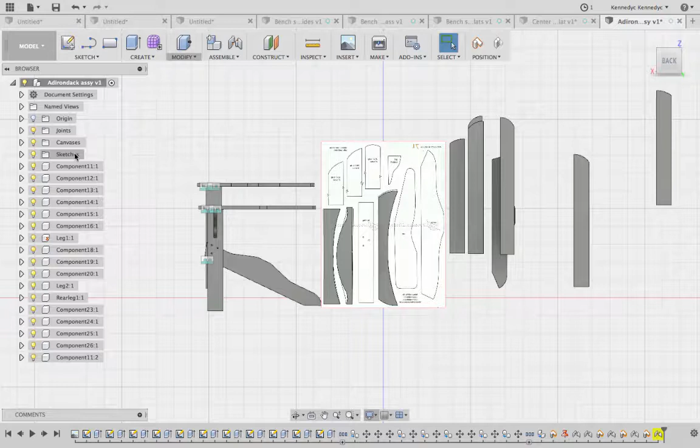As you can see, once we've started creating lots and lots of pieces for a more complex design like the Adirondack chair, it gets very messy down here if we're not following those rules and coming through and actually naming components. So it's really important that we actually do that from the beginning.

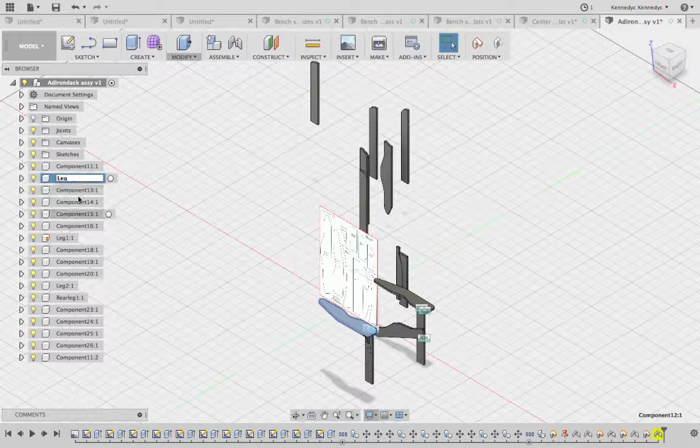You can see on this one here, we start to have a look at each part. We can come through. I've changed them all to components, but I haven't named them. So this one is going to be called the arm, and it's the left one. And click on each component. This one here is the upper rear cross piece.

This one here is rear back slat. And you get the picture, so on and so forth. You can come through and develop all of those.

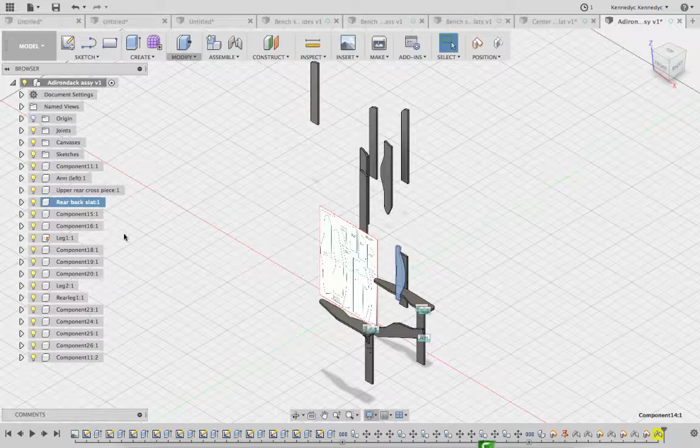Now, if you have used a canvas and created all of your parts, you might create each of these parts sitting on the canvas, extrude the profile, and then slide them off to the side like I've done here. But they won't be in the correct orientation. They're all going to be as though they're laying flat on the ground, not assembled. So when you come through to prepare them for assembly, you need to get them in the correct orientation.

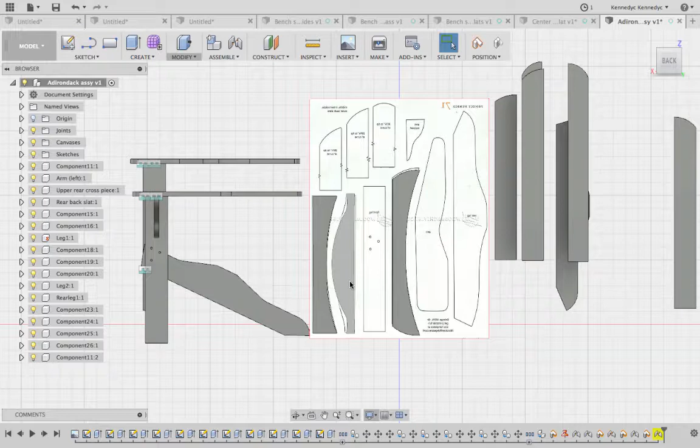So a couple of things. First of all, let me show you this one here. We'll check out that view in that orientation. Notice the last thing I need to do to this one is actually put a beveled edge on that. So if I zoom in, we can go to

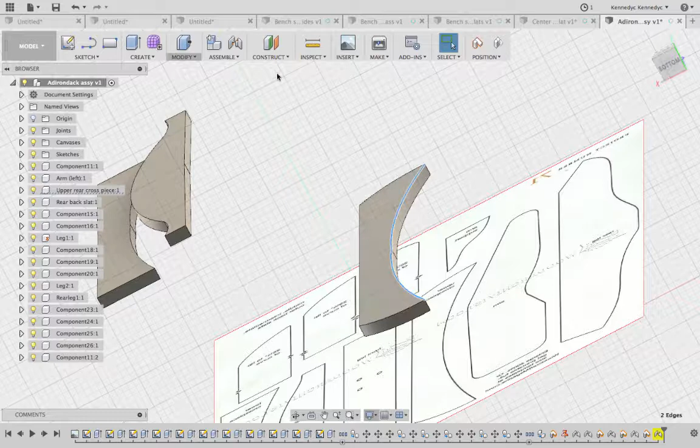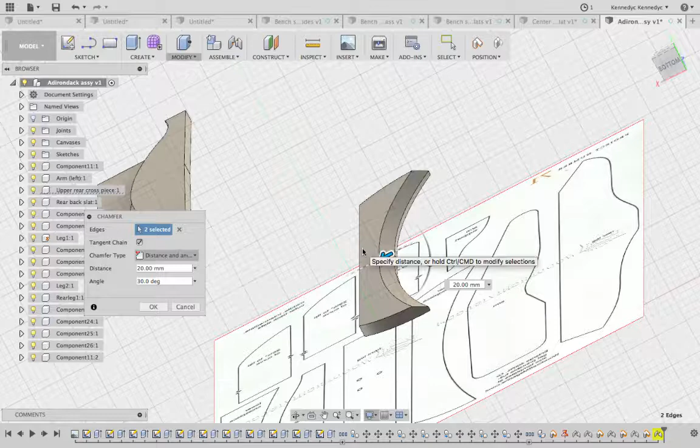chamfer, and rather than a 45-degree chamfer, we might say distance and angle, and I want the angle to be the angle that the back slats sit back at, I think, is 30 degrees. And so we put that in at 30 degrees, and we're going to just push that back because the back slats are actually going to lean back on that. So that's the final thing we need to do for the upper rear cross piece.

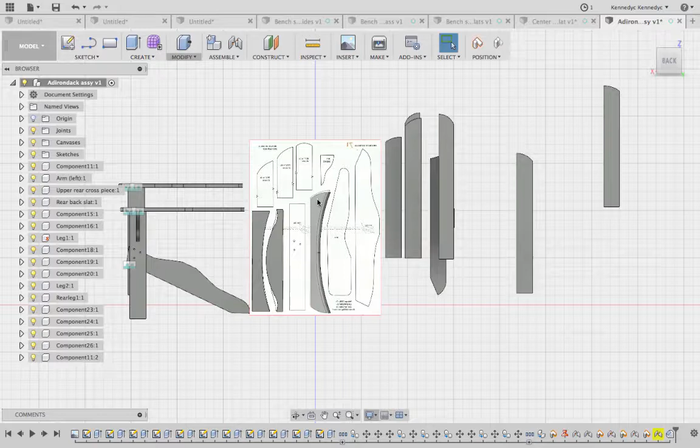And then we can come through, and I'm just going to pick the correct view. Click OK. And we're going to go to that back view there. We want to go to modify and move or copy. And we're going to say, well, which components do we want to move? We've selected this one here. And then we just need to get it in the right angle.

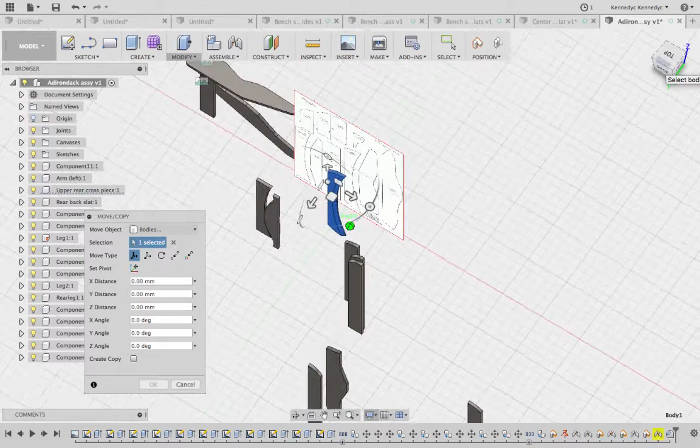So this needs to be flipped so that it sits at the back there horizontally. And it's not doing anything like that at all at the moment. So what we're going to do is we're just going to move that around until we can pick up this piece here. I'm going to bring that up at 90 degrees there. Okay, now it's facing the wrong way, but it's in the correct plane.

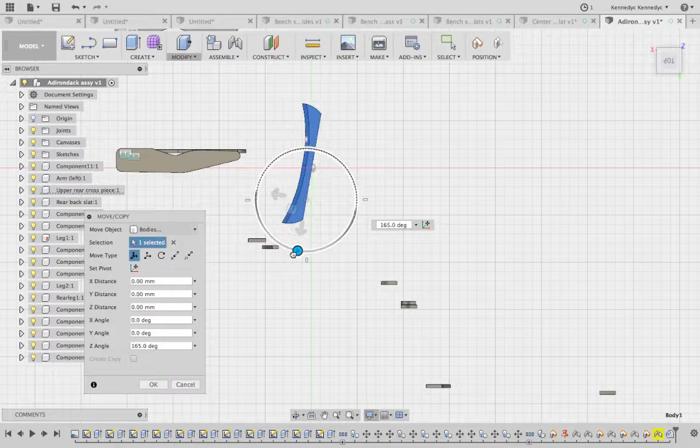So I might go to my top view, and we can grab that little movement wheel and flick around 180. You can specify the angle, or it should snap in and lock into those key distances. Click OK, and we'll go back to our isometric view. You can see that's in the correct orientation now. I haven't assembled it yet, but it's in the correct orientation, ready to go. And you come through and do that for all of these.

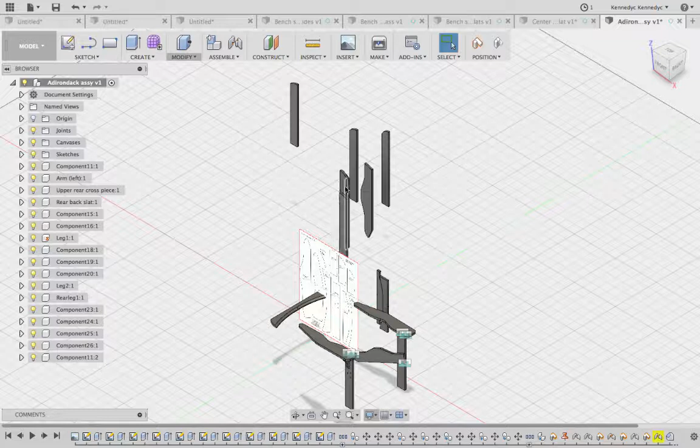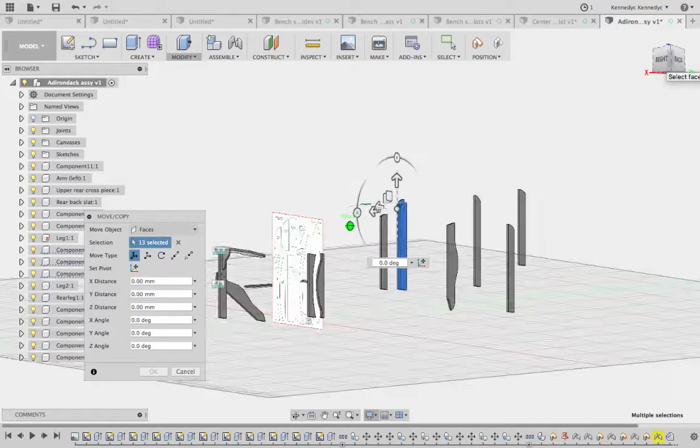Okay, so if we click on our slats here, we click M for move or copy, and then we're going to come around and pick the correct plane. Whoops. I've selected a face. I want to select the whole component. I might need to go to a different view just to isolate that. Let's pick this one here. Selected too many there. We're going to click on that. We want to select components, and that's it there.

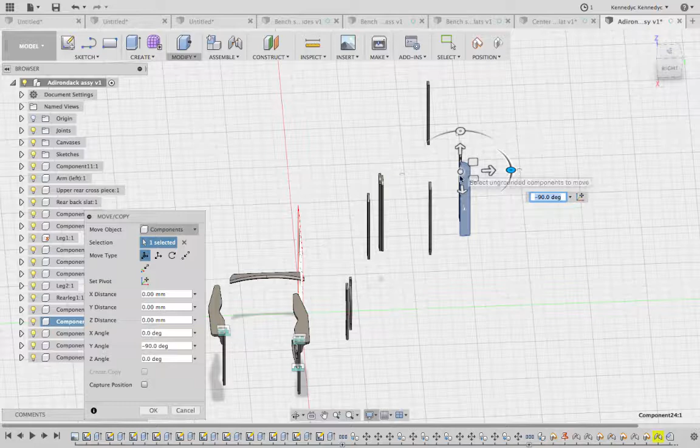Okay. Work out which plane it's in, and we're going to select this one here and swing that around. And that one will act as my right intermediate back slat. Click OK, and then you can move on to the next one. So again, it's going to be a lot of toggling around, playing around with the little cube up the top to find the views. Okay, and this one here, rear back slat.

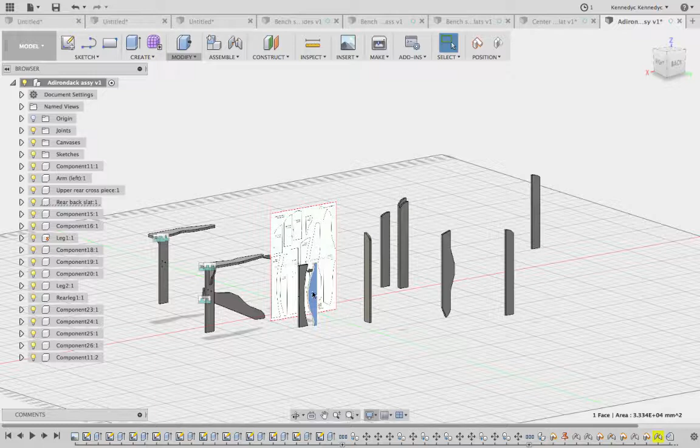Let's click M for move. Now I've selected its face there. We want to deselect that. Click on components and select that as a whole component. We're going to need to move that around until I can find the correct one to move.

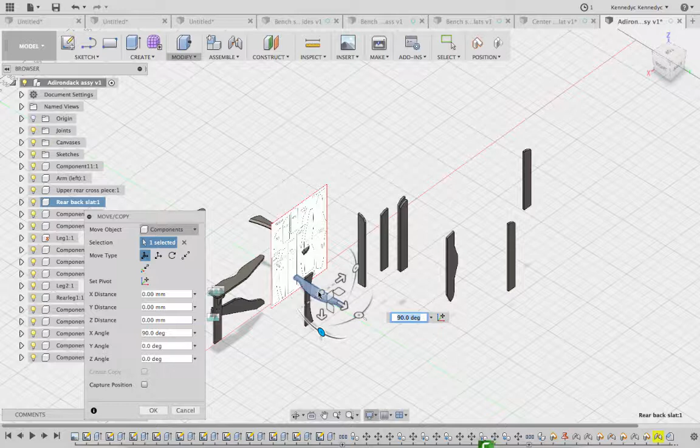That's this one here. Bring that down 90 degrees. And then we also need to flip it over at 180. So I'm going to slide that around there. And now that's in the correct orientation. Click OK. And that will sit at the back of the seat slats there and rest up against the base of the backrests.